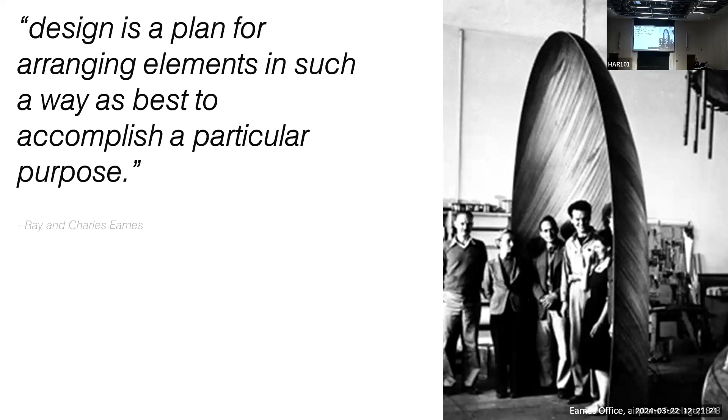And the difference of what we're doing now compared to what they were doing half a century ago is that we now approach this problem from the point of view of how we can use computation and computational fabrication in order to have entirely new ways of actually getting those materials into space, into the right places.

So this is a shoe from Flyknit. This is also now a bit dated, but it's a really simple thread, right? So not a huge classic material science innovation. Same threads, maybe some different colors, but now we're using computational design and digital fabrication in order to come up with entirely new functional and also aesthetic patterning within this.

In architecture and building construction, even within the institutes and the places that I have worked, typically this type of synthesis between the kind of digital fabrication machines and the material tends to look like this. So it's like, what can we get from the car industry? This is a Tesla fabrication plant that's probably really close by here. I think it's in Southern California.

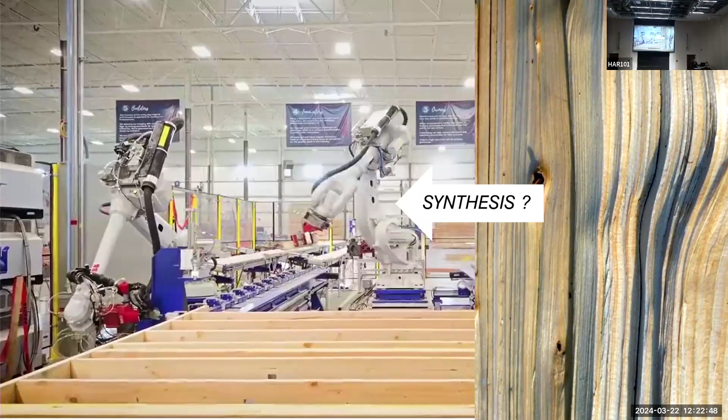But the problem is that then these types of processes don't really address the building materials that they work with. And we can argue that, okay, even if we apply them to these types of building materials, so this is a plant in Idaho, actually, where the robots are automating basically stick frame panel construction. So even if we have these tools, again, now they're just putting the materials together in the same way that humans would put them together.

But this is a robot that can lift like 1,000 pounds probably. And then at the same time, the architecture that we get out of that is the same architecture. And that to me doesn't really make sense. And I don't think that in the end, it really means that we're utilizing what the materials can do, because these are the same materials that we've worked with for a long time. And now we have these ways of approaching them differently.

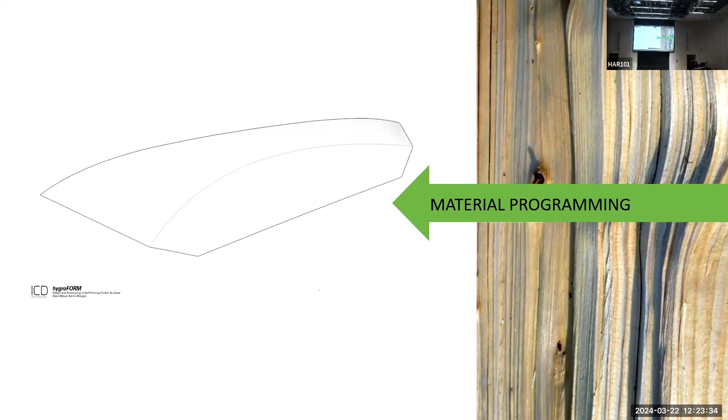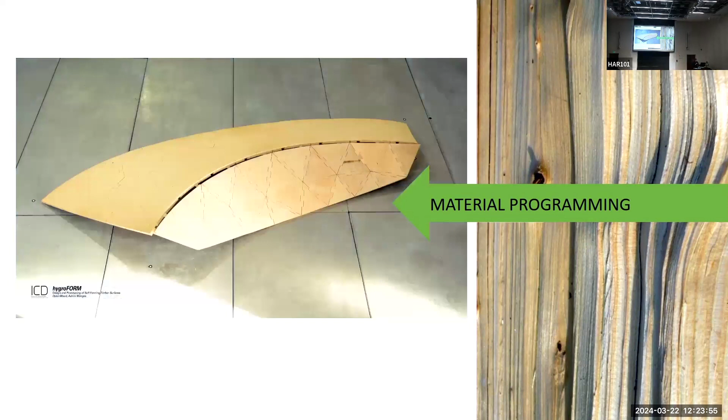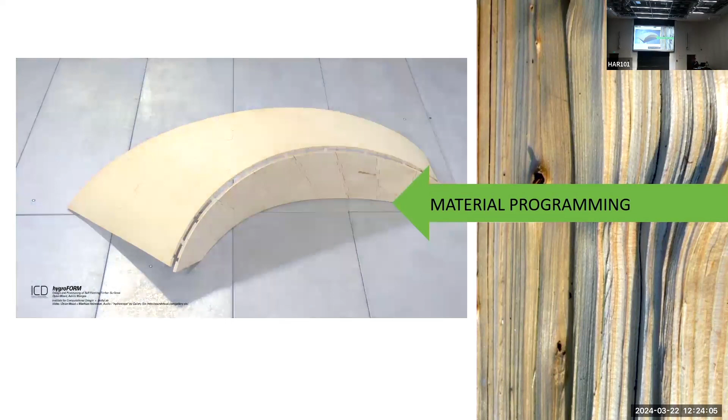So one way that we propose in my group in order to address this is to come up with this idea of material programming. And we define material programming as a method of design in which we can use computation and fabrication to encode functions and structure directly within physical material systems, of course, based on what the materials can actually do. And through these fabrication logics, we can develop new methods of lightweight and light touch construction. And we can also apply these in different types of building components and building systems.

And the advantage being that because we rely on what the material can do, we can embed a lot more functionalities without going towards these sort of electronic control systems, which are good for some things and maybe not for others. But the best example of material programming actually probably still comes from nature in something like the spruce cone, which I would encourage you to go get some spruce cones from the park over there and try this out because it will work 100% of the time.

So what happens in the spruce cone is that the bracts or the scales of the cone, when the cone falls from the tree, they start drying out, they lose moisture, and they open up automatically in order to release the seeds from the cone. And the way that this works is that there's no Arduino kit or sensors or actuators embedded in this. That would be insane if you think about how many pine cones there are on Earth and how many bracts open. I think it would be like billions, right?

So similarly for buildings, there's lots of electronic controls. That's really great. But if you need an Arduino in every window that you have, you're going to start to reach a sort of financial and kind of complexity problem. So the way that it works in the pine cone is that the structure of the cells inside of the bracts give it this functionality to both protect the cone, but then also actuate through a change in moisture.

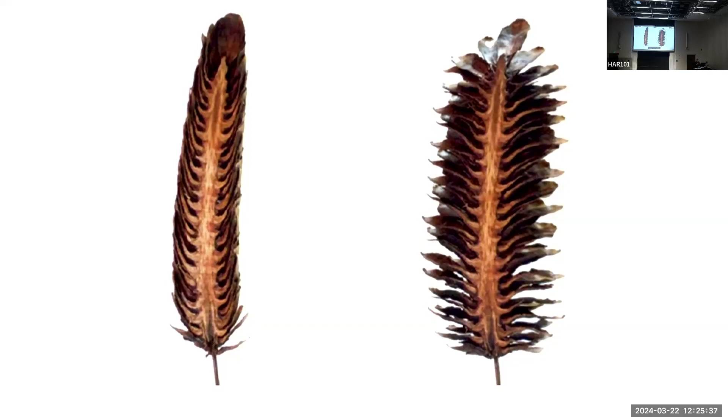So when we think about the pine cone, we can define this kind of material programming logic within here. So we have an input that's a sort of sensing the change in moisture content in the air or in the relative humidity in the air. Then there's a physical computation, and then there's an actuation, the actuation being the opening of the scales. And we call this programming because we have a reliable comparison between an input and an output. So there's no digital signals here, but we can define an equation or a relationship that is repeatable, and in that case, we say it's a program.

The really interesting thing is that wood as a material, very similar to the pine cone, is made of cellulosic materials. And it also has the same function of changing its shape when it changes its moisture content, which is what powers the movement in the pine cone. And we call this type of action hygromorphic, hygro meaning changing with water, and morphic meaning changing shape. And in science, this is also called hygroscopic properties, but this doesn't relate directly necessarily to the change in shape, so we'll say hygromorphic.

In wood, this happens because within all types of wood there are these little cellulose fibers, and those get bigger and smaller when they have more or less water inside of them.

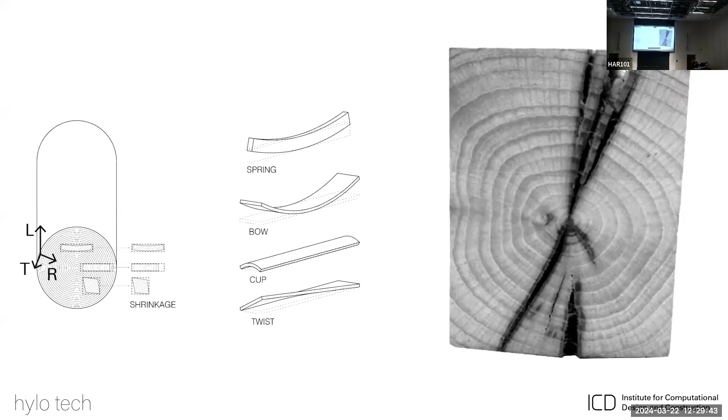This change in shape happens in relatively normal conditions on Earth. We're not talking about space architecture, a really popular thing to study at MIT—we're talking about things here on Earth. The material is made here on Earth, and it's also designed to function very well here on Earth.

Again, if we apply a digital lens or programming lens to that, we can take a block of wood and scientifically define, from both literature and physical testing, how these different properties behave in the anatomical directions, which are defined as tangential, radial, and longitudinal. You can see that the values are very different in the different directions. That becomes our base for programming—the inputs that we put into our digital and physical code.

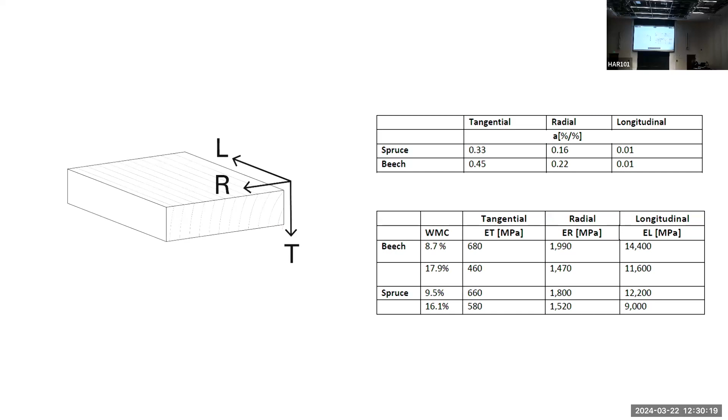Very early on, I did a lot of work as a master's student on how we can upscale these properties—how we can take a basic log and break it down logically in a way that makes sense for reshaping it through the hygromorphic properties, then basically put it back together so that it actually does this. We call this form generation.

Now I'm going to explain a couple of projects that fall into those lines of form generation.

But first I have to explain a little bit about the research group where I work, because when I say 'we,' it's not metaphorical—it's actually a large team of people across different disciplines working on these types of projects. The projects range, and the approach of material programming is applied across all different scales, even though the approach is very similar.

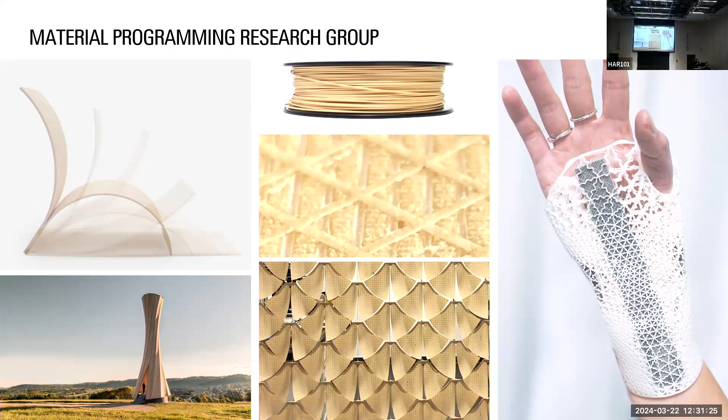So we work on things down to wearables and furniture, as well as building facades, and on the bottom left, full scale load-bearing building components. But the principles are all the same, and it's kind of the same team, mostly made of architects, actually.

In Stuttgart, this is where our group sat. We worked within an institute, the Institute for Computational Design and Construction, run by Professor Achim Menges, and we also worked closely with the Institute for Building Structures and Structural Design, run by Professor Jan Knippers.

So that's sort of where our internal group sat. But we also work with larger funding bodies and centers, as well as other institutes in the university, and industry partners ranging from building construction to footwear, as well as many international partners. So we are interdisciplinary, but also working across the range of fundamental research as well as industry-sponsored work.

These are the people involved. You might also know Tiffany Chen, a USC undergrad and BArch grad one year after me, who followed a similar path through Cambridge to come work in Stuttgart. We had a team of six or seven really great people in Stuttgart, mostly from design backgrounds. Now at the University of Oregon, I have a much younger team of undergrad and graduate students working on these topics.

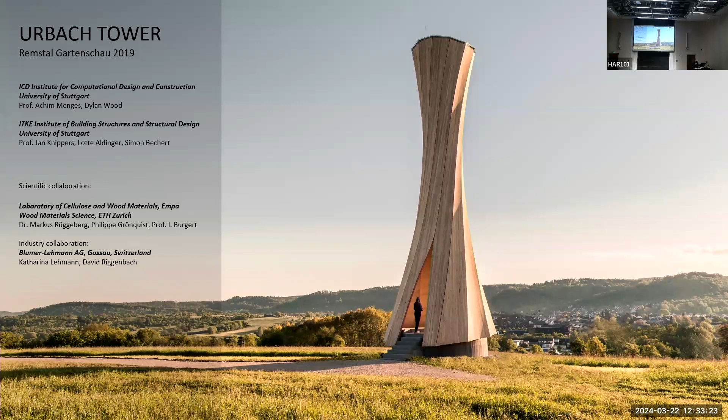The first project is the Urbach Tower, made in 2019 in southern Germany, and it's still there. This came about after my master's thesis in Stuttgart, when we got funding from the Swiss Foundation, which funds industry innovation in Switzerland, to think about how we could upscale these hygromorphic self-shaping concepts to work on a building scale.

At the same time, mass timber is really big now in the US, but it's been around for a long time in Europe. Still, the impact of mass timber is in these really boxy forms, which in engineering are grouped into a category where we have mass timber but are still applying it as if it were precast concrete panels. You see that in the resulting architecture.

So it's this very boxy result, which is great—it's a good first step. But what we want to look at is what architecture that really belongs to timber, or really emerges from timber and these digital technologies, would look like. It's not going to be classic timber frames, and it's not going to be something emulating another material system. It's going to be something different.

At the same time, CLT, or cross-laminated timber, that you see here actually has a material programming logic to it with the layers and layups that exist. It's just that this has always been geared towards structural performance.

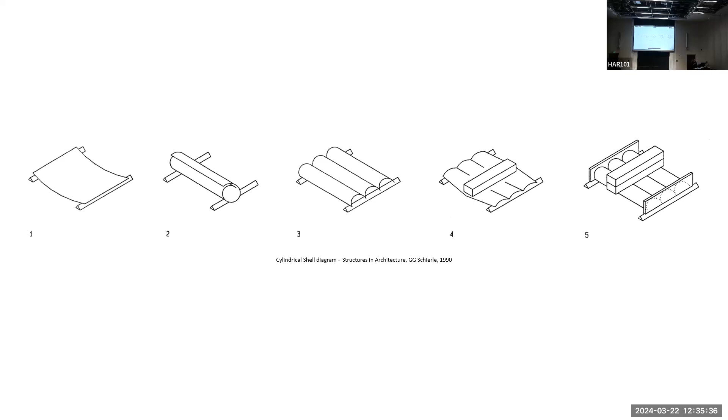There's also a simpler approach: you can use curvature, use geometry. Then you can span a much larger distance with considerably less material. In wood, you can make curved shapes, it's just way more expensive. You see this in a lot of really expensive buildings, for Swatch or Omega, Swiss watch companies, or in golf courses and things like that. You can do it with beams, but it's very expensive and exponentially more so as you become more complex in your curvature.

And the processes for getting there are relatively crude—you have to bend it, or in most cases, you just build a big rectangle and cut out a curve shape, which tends to be cheaper in practice.

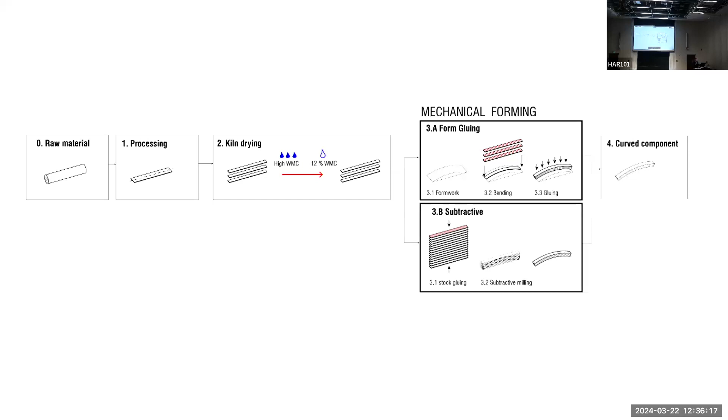What we proposed, working with industry partner Blumer Lehmann in Gosau, Switzerland, is that we could implement this self-shaping approach of generating curvature through hygromorphic properties into their existing workflow of drying timber from the trees, then curve elements in a parallel process and glue them together to get a bigger curved element.

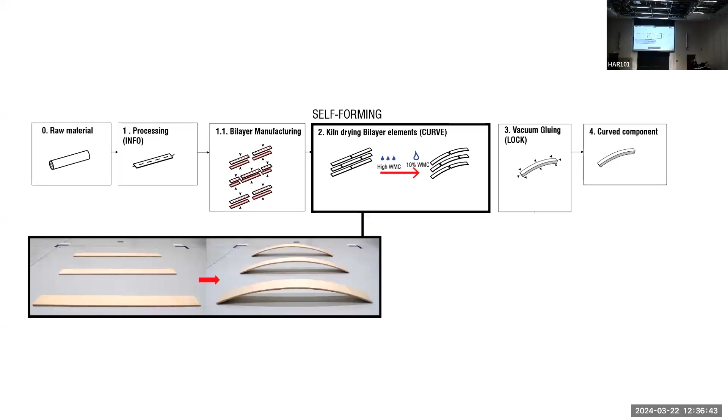At the same time, we worked closely with wood scientists and engineers to develop methods for predicting this type of movement. We used really analytical equations like this, from the 1920s, that work really well—they were developed for bimetals in thermostats. I'm sure Doris knows these equations very well.

They're awesome, they work really, really well. But we also work on really high-tech ways of doing that, in which there are numeric modeling methods being developed to model hygromorphic properties in wood.

There's a lot of funding in this, because if you imagine a 50-story building, each story, even if it just moves a few millimeters, by the time you get to the top you've got a really big problem. Thomas Robinson from Lever told me a few weeks ago in his lecture that in a normal stick frame building you get maybe 5 inches off by the time you get to the top of the building, and this is a real problem.

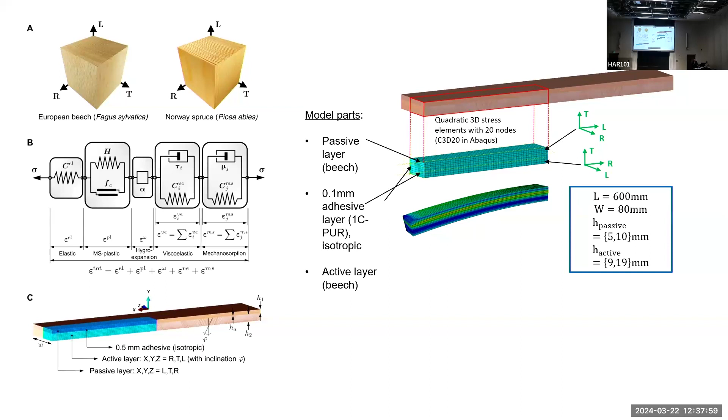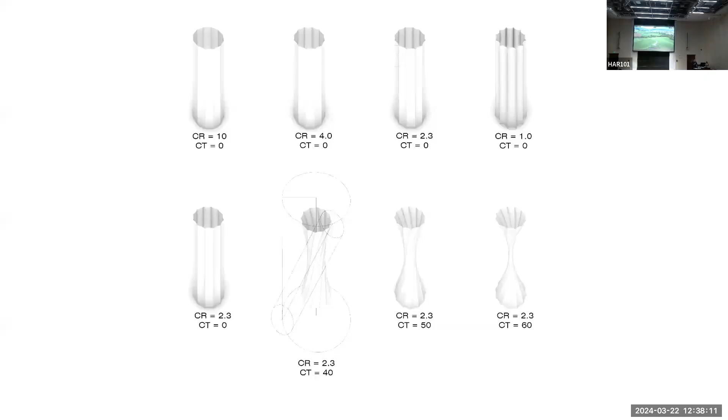So it's a problem we have to address, and we piggyback onto that modeling here for a kind of extreme case. At the same time, we work as architects, so we were asked to design a tower structure. That might seem random, but it's perfect because it gives us an opportunity to show how strong this can be and also how light it can be.

Working with Grasshopper and Rhino, and also some connections to engineering software, we're able to come up with geometries that work really well with the types of shapes or surfaces we can generate using the self-shaping process. This looks like a really simple Grasshopper exercise. I'd challenge you, if you think you can recreate it, go for it. There are a lot of YouTube videos of people who've done it incorrectly.

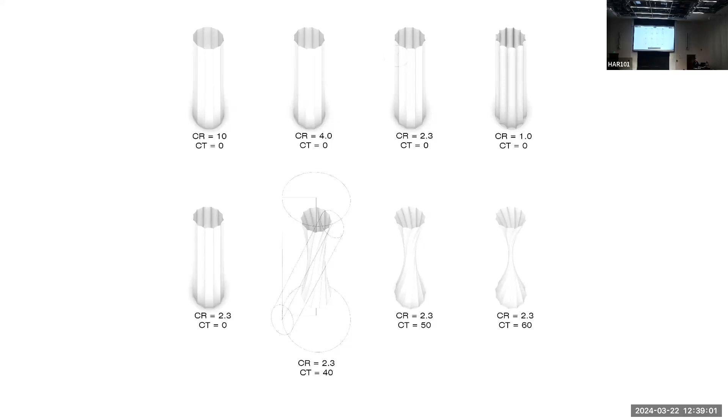But here it's about really matching what you can create with the research to come up with new forms. These forms are particularly interesting because they're sort of segmented shells, so they're not continuous, and they're made from single curvature elements - that's what you can see here. So it's not like a dome or a hyper shape, but when we put all of those elements together, we do get a hyper-shaped, sort of double-curved overall geometry, which works really well structurally.

So we end up with a kind of corrugated surface structure that doesn't fit into any categories or typologies, but works really well structurally and also aesthetically. And then we model a lot of the connections, of course - that's where the digital planning comes in and really works.

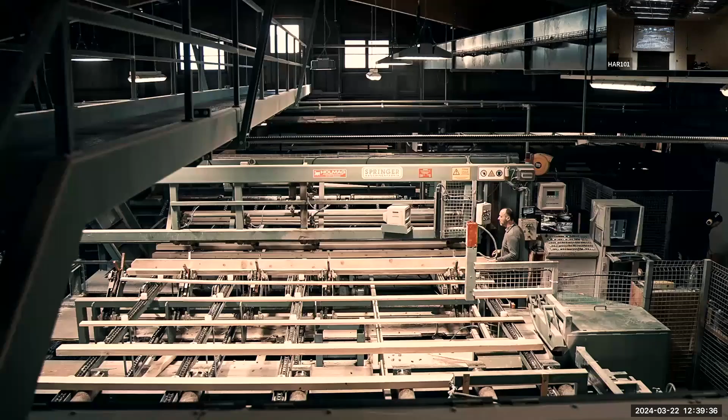We'll try to pick up speed so we can go through more of these. So the process here is very digital - we do tons of planning, but then the manufacturing starts here with this guy, explaining to him in Swiss German, which is a totally different language that changes constantly, how to actually sort out the boards as they go through the line.

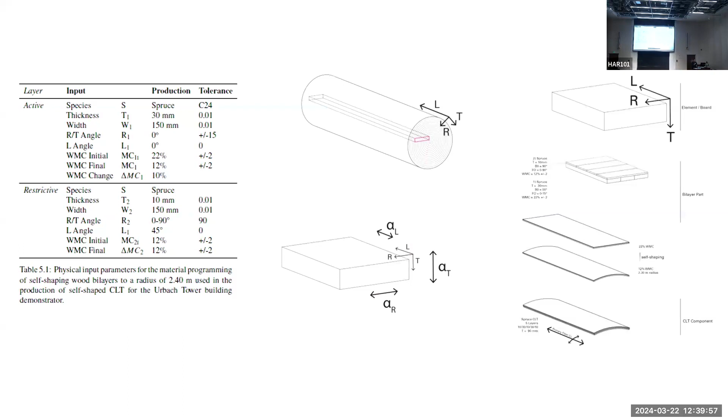So this is the code, or the programming code, that came from all this work, and it tells him simply which boards to choose from this continuous throughput of boards. We're just choosing based on moisture content and grain angle, so there's nothing complicated. There's no special wood, it's not the more expensive wood - it's just telling him to sort based on simple parameters.

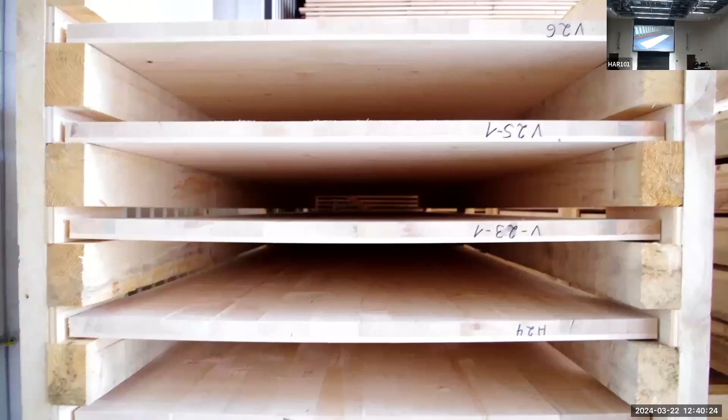And then we glue those into flat plates. Then they go into the kiln where they get dried mechanically - this is what happens inside the kiln. So we have these huge flat plates, and kind of magically, as they lose moisture content, the curvature emerges, sort of for free.

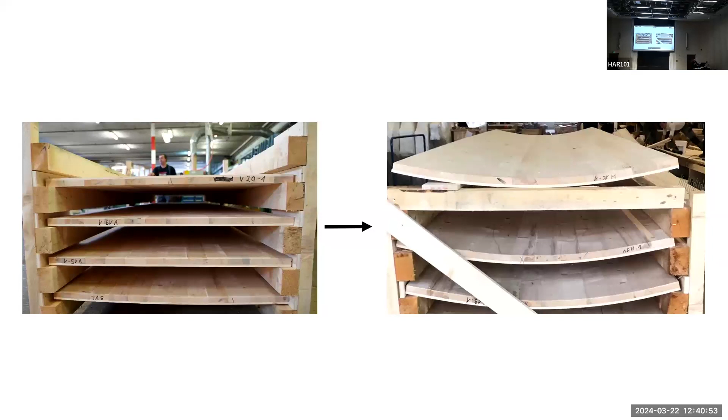They do this on a massive scale in the factory, so it's a parallel production process, which is different from using a mold - which is really great. They all shape at the same time when they put them in the kiln, so you don't have to wait. And then here you can see already, even though they look shallowly curved because they're so long, you can see how that gives stiffness to the panel.

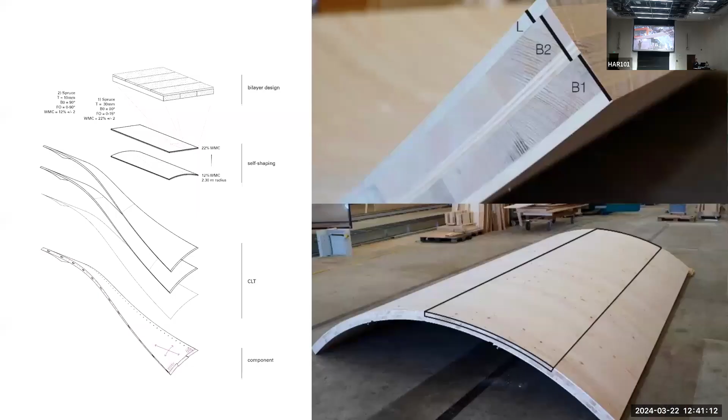So this is about a 1 inch thick panel, and it doesn't bend in the opposite direction when we pick it up with the crane. Then we put all of these plates together, glue them, and lock them into shape, and build them into bigger components. We have to structurally test this to prove that it works as normal CLT would in a structural situation.

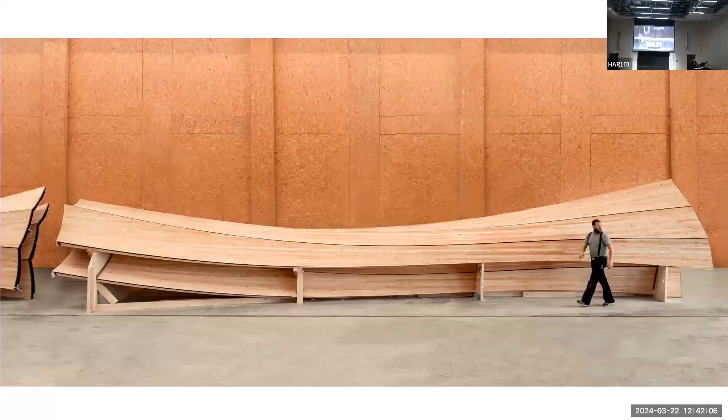So then they get pre-assembled into these packets, also with a timber facade. On site, all the holes are already there for all of the screws in the connections that have to happen on site. That means it's 100% prefabricated. They come in here and like 4 guys put the whole tower up in 8 hours.

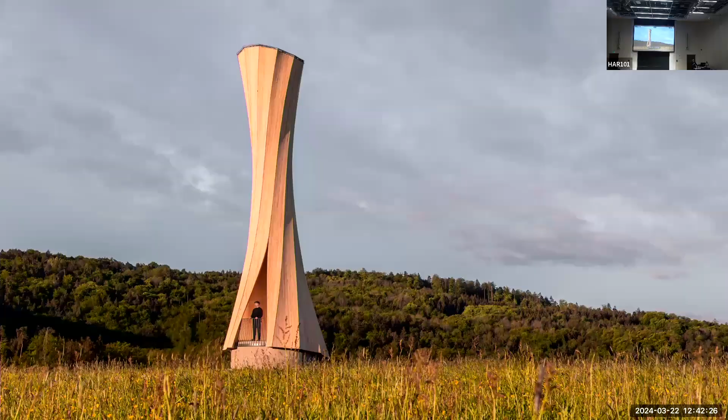That's especially important because this was on a natural preserve site, so the site impact is really limited. In contrast, it took 2.5 weeks for the concrete fabricators to put in the foundation. So 2.5 weeks versus 8 hours on site—it's a really big difference.

What we get is this structure that from the outside has these really sharp curves, but on the inside takes on a slightly different type of texture. It's 14 meters tall, acting basically like a cantilever, and it has to take wind load. But at the same time, it's only 90 millimeters thick—about this thick.

And if Sigrid was here, we could debate how to compare that to an eggshell, and that would be really fun. We have different opinions about that, but I think it's thinner than an eggshell, proportionally.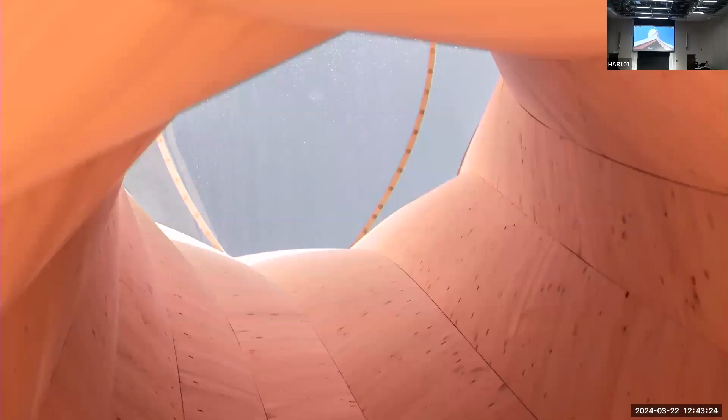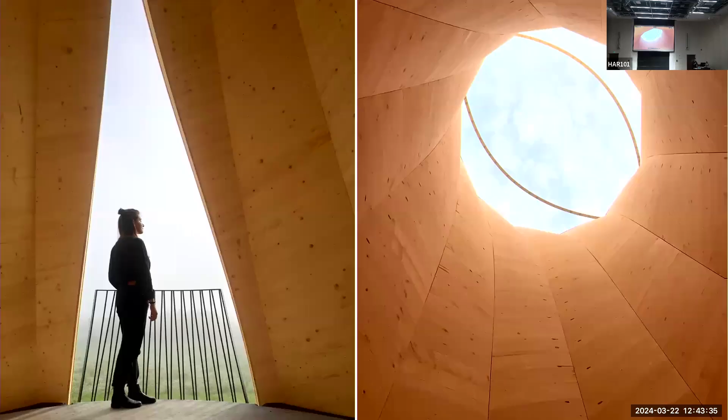But maybe more interesting is that architecturally on the inside, we get this incredibly soft, almost pillow-like texture, which isn't common for timber. Now that we have curved surfaces in timber, this is what we get—and it's doing a lot of work. So this becomes a kind of chapel. It doesn't have a huge functionality, it's kind of like the little chapel here at USC, if you've ever been there, or some of these Zumthor projects that sit in the landscape and change your interpretation of the landscape around you—a very known situation that puts you in a very unknown one.

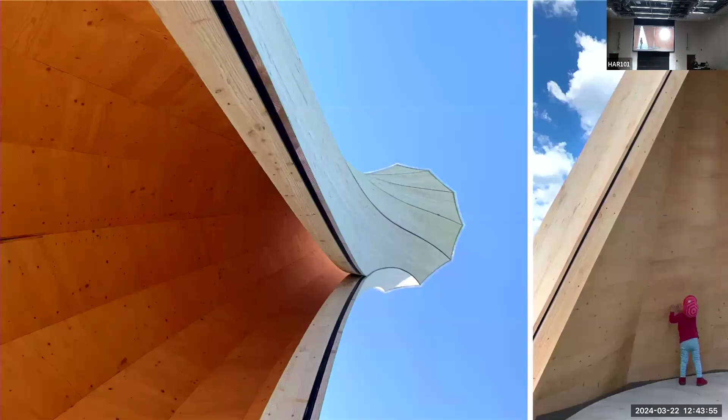At the same time, what's most impressive is that here the timber is doing all of the work. It's a monocoque shell, it's the cladding, and it's also unfinished—safe for this child to touch. We don't need to treat it with anything special on the inside. And not only that, but it's also like the machine that shaped itself—it becomes both the fabrication machine and the structure at the end.

And then it sits in this landscape really beautifully, and it's also become a kind of local landmark that's accessible primarily by bike and by foot. We're hoping that it will stay there for many years to come.

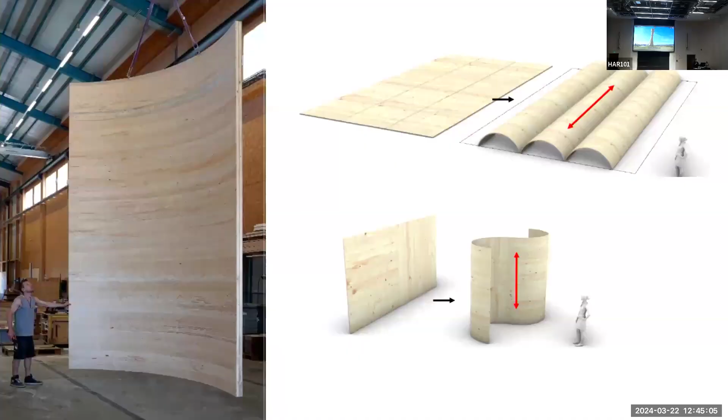At the same time, on the research side, we continue working on it. These are some leftover pieces from the project that we turned into structural components as demonstrators, and we're working on how to apply this as wall and roof components.

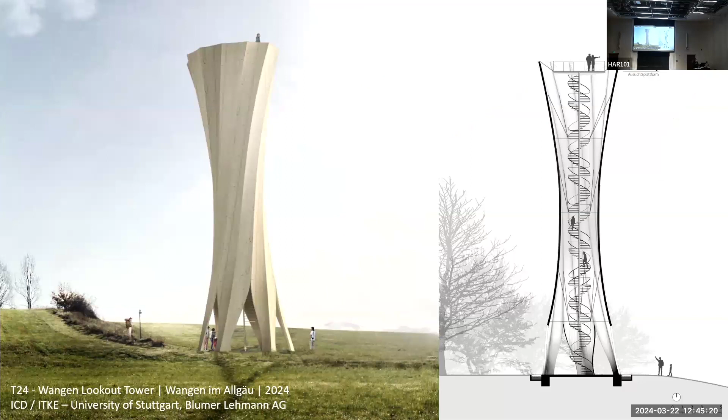We're also at the moment constructing another taller tower—this one will be 22 meters tall in the end. It has a staircase in the middle that allows you to actually experience going up through this winding form. What's fantastic about this is it also represents a huge shift in the perception of the materials we use.

Here the timber is taking all the wind load as a shell, and it's also taking the gravity load of the platform, while the steel is really just kind of there as a staircase. This is an inversion of how we'd typically do this—usually steel reinforces the timber and provides all the strength. Here, because we get the geometry of the timber right, hopefully the timber is doing all of the work.

That's huge because it represents a total shift in what we think materials can do. We could probably get rid of the steel even, if we wanted a more solid staircase. Also impressive is how thin it is. We don't need to use a lot of timber in order to do that, as long as we get it into the right shape.

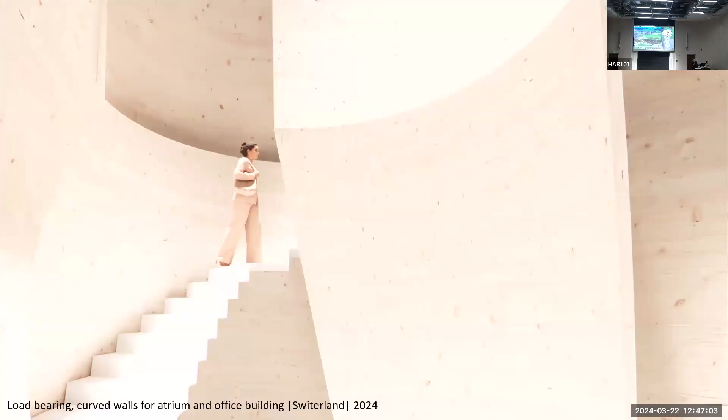At the same time, we're also working on another project which uses these in structural walls, almost like shear walls. Again, we can make them thinner, and we also get a really nice architectural experience.

But maybe even more interesting is that through this, we start to develop more machine learning based methods that utilize machine learning and machine vision to take a different approach to predicting the geometry and shape change. Through these new projects, we record tons of data in the manufacturing process, and mix that data in a hybrid method with synthetic data that comes from the models. We've proven that through all of that, we can actually outperform statistically the Timoshenko model, which is the analytical model, as well as these ultra advanced models that use typical numerical methods.

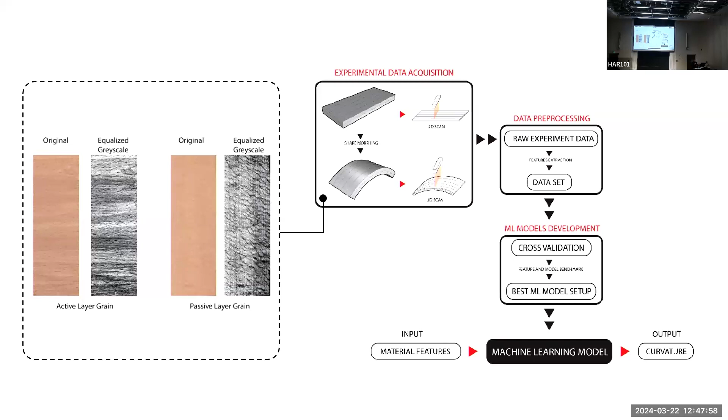Now I'm going to show you, I think we'll only have time for one other project, but I'll show you this one. From there we can also apply these principles to form adaptation. So here, not necessarily just generating the form, but designing it in a way that it can actually adapt to changes in the environment that happen.

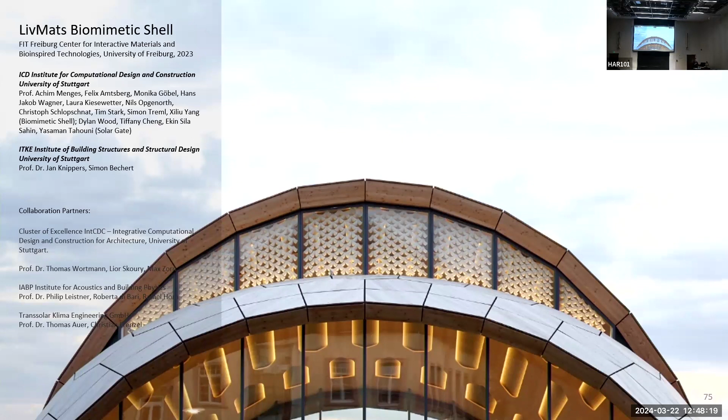We'll show this through a project called the LivMats biomimetic shell. It's also in southern Germany, and it's actually constructed now. This built on a lot of previous work in the institute that looked at how we could use wood materials and new materials in a way that they actually adapt and change their shape in relation to the environment.

The concept is really similar because we use wood-based composites. The difference here is that we need to reconstruct the material, working on a smaller scale, and like timber, it has an existing structure. So instead of utilizing that existing structure, we take it apart and put it back together into new types of materials where we can further tune how they work.

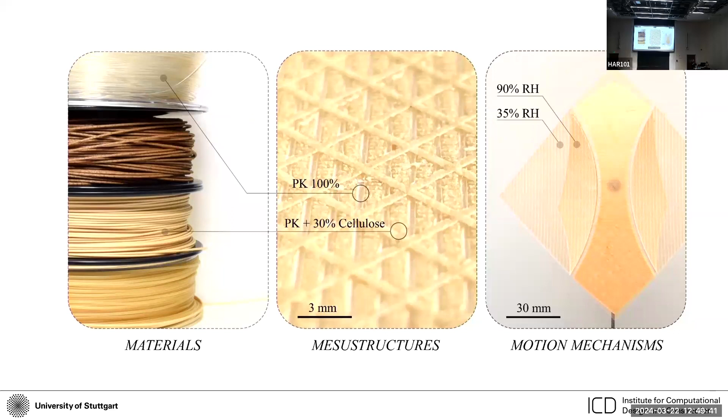We do that on three different levels. One is really in the materials themselves, so working with plastics engineers, we take cellulose fibers, which are incredibly cheap - it's like the cheapest material on earth, used actually as food additives - and mix that into bioplastics. That's one level we can tune. Then on the next level, we use a 3D printer to structure them up, on the millimeter scale. And then we use our more architectural and design scale approaches on this multi-millimeter level to design motion mechanisms.

And this is what we get. So this is a lab test here, you can see it opening when we have a high moisture content - this one is sped up. And then when we lower the moisture content in the lab down to 35%, which you still experience on Earth, it closes up. And then this is the best part of the whole video.

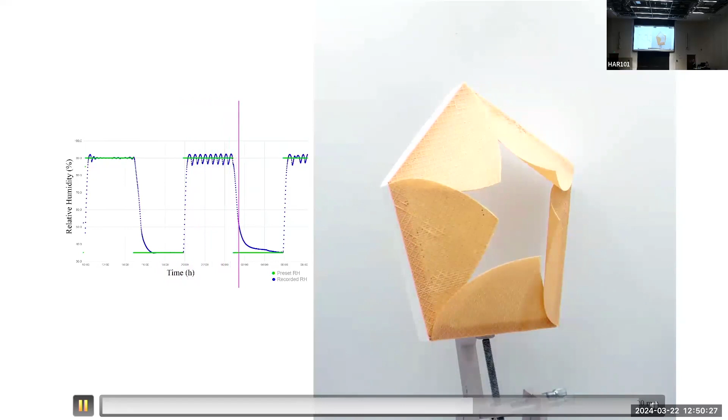Here, our mechanical system in the chamber actually malfunctions, so you can see it flickering, right? And you can see how quickly the materials respond - they're like hard-coded to the changes in moisture in the air on a really direct level.

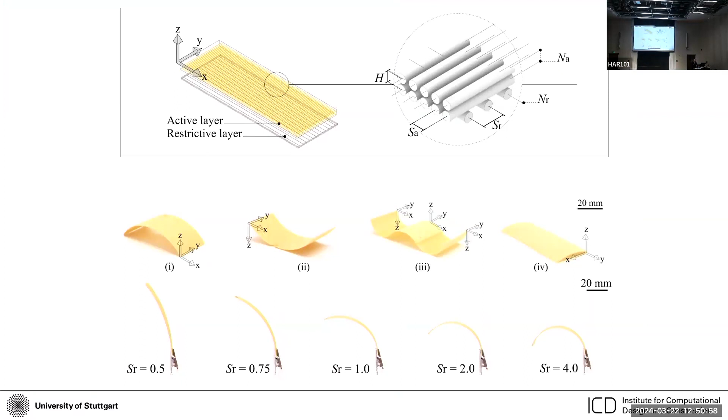The way we make them is from this sort of powder material. We integrate it in, then we 3D print it again with the basic off-the-shelf, cheapest 3D printer you can buy, but we program it ourselves, giving the 3D printer slightly more intelligent methods. Then we can tune the shape and directionality just through this line structure that we build up. We can also choreograph the speed, which is really, really fun.

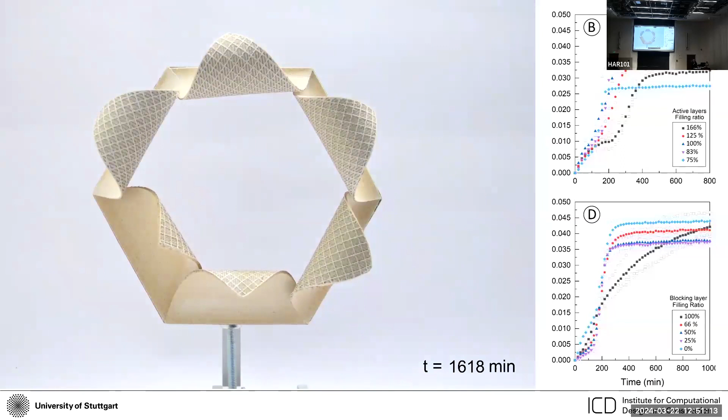So here we have the same thickness, and one operates in minutes and one operates on the far end in days, which is really, really cool. So we can do that without drastically changing the mechanical properties, which is quite useful.

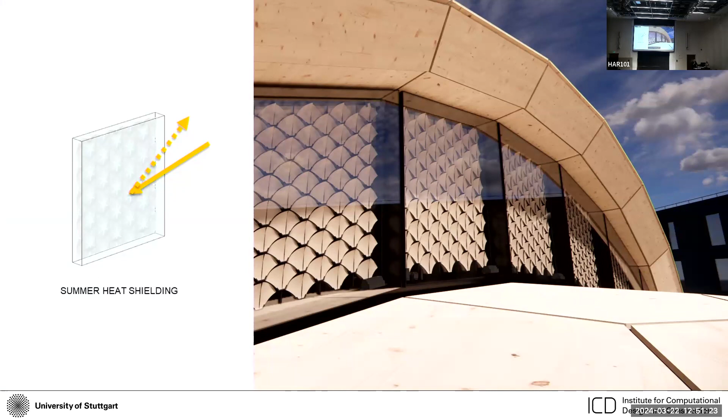And then we look at how we can apply this in a building facade. So shading in the summer, shielding from the heat, and then letting the facade open up so that we can gather heat in the winter. And we work also on this one with Thomas Auer at Transsolar in order to really start to quantify this. We're not quite there, but you can see, so this is our building.

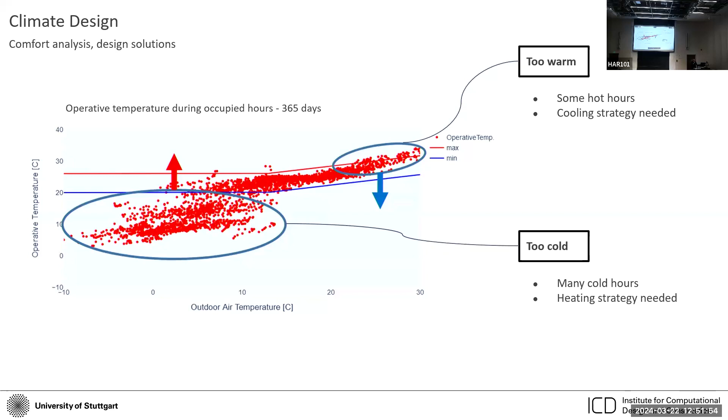We have some comfort days that are too cold. That tended to be the driving factor. Then we have some that are too warm. In that climate, that was not the biggest issue. So what we do is we orient the facade here to the south so that we can get as much heat in the winter as we can. But then that means that we need to have this adaptive shading system to reliably shade that in the summer.

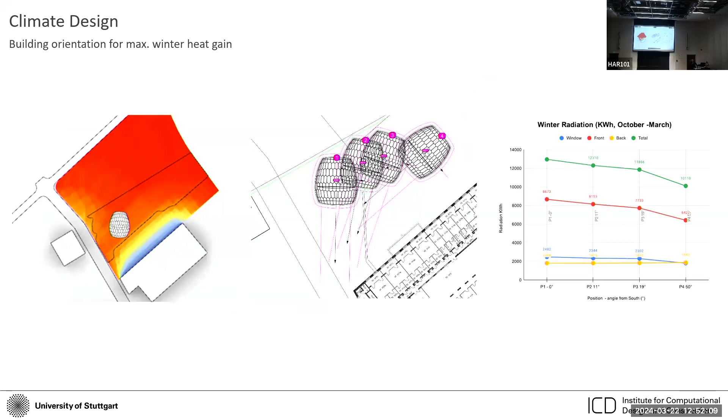We have the advantage here that we design the building at the same time, so we can do things like adjust the overhangs to work with our system. And then we're able to develop a method in which we actually build almost like a framework for testing these materials. And the idea is that our materials will go into the facade now, and then in a couple of years, it's built so that other people can test materials in there as well.

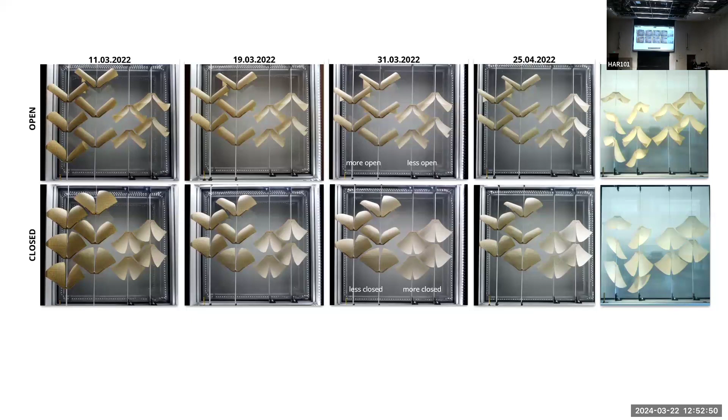So our lab designed this whole framework, down to the detailing. It requires a ton of material tests. These things can be sometimes unpredictable. And we have to take into consideration UV exposure, for example. This is the video that I really wanted to show you, Doris. So this is a lab test. We did this over COVID. It was great. We just stick it in there, let it go for a week.

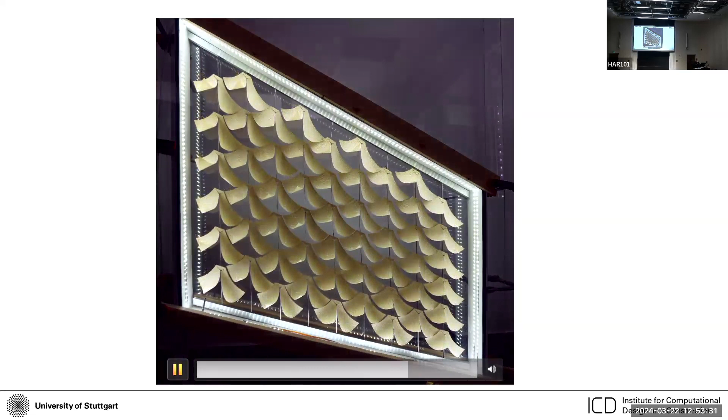But what you should see here is, okay, beautiful movement, right? In our system, really great. And then at some point in here, you will see that before our system fails, the lights actually start falling off, if I have the right video. And the testing system itself actually starts to fail before our material system. Maybe I got the new edited video.

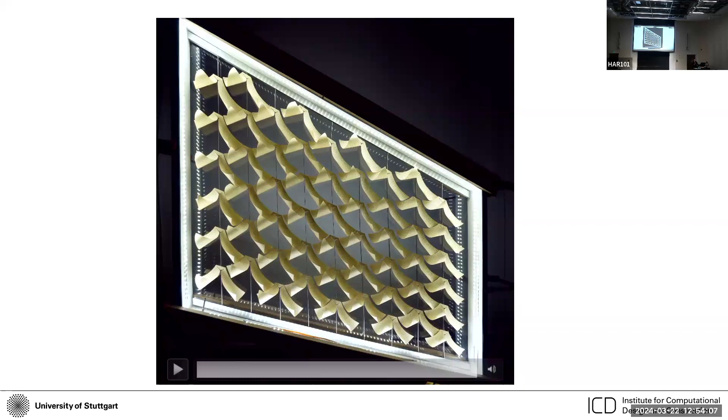Okay, but what you can see is that we have an insanely coordinated and reliable movement, which is very natural, but it's not something that you would ever expect with a machine. I've never seen a machine that can move like that. Doris, some of your work gets to that, right? But you still always have a popping, right? Or a flip through. So this is completely silent, 100% silent, I guarantee you. Okay, so that's how that works.

We installed it then live, so we tested it in our lab for over a year in a facade that was built up on a scaffolding at the exact orientation and height as it would be in the building in order to prove it. A lot of it failed. We had to redo this over and over again. And then we installed it in the building, 12 square meters of this, and we could print it with a farm of 12 printers in around a week probably.

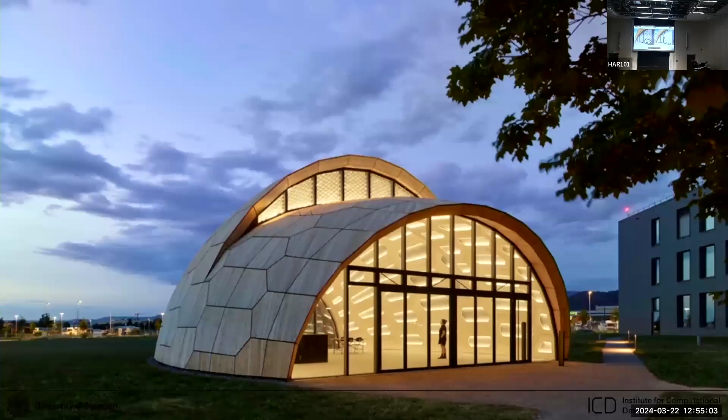And again, we used so little material here. So the material cost here is so low because the cellulose powder that we buy, which is doing all of the work, you normally buy by the ton. So we had to pay extra money in order to get a grain bag full of this cellulose powder that we use here. And that does all of the work, right? And it's the technique that we apply to that relatively dirt cheap material that gives it the intelligence.

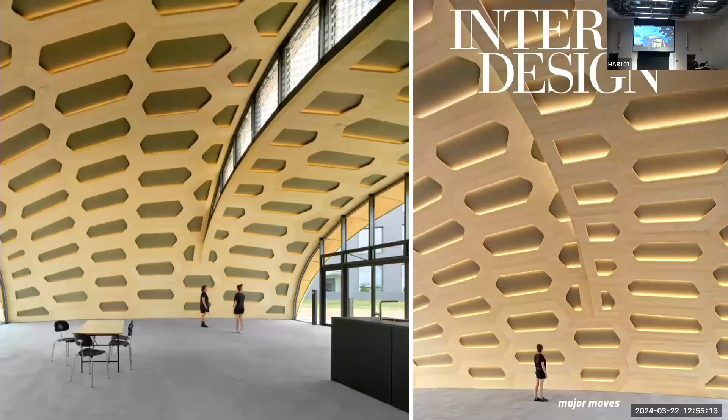This building was also featured recently on the cover of Interior Design. And you can see there the facade system from the inside. And we're currently monitoring that now over a relatively long period of time. I'll go through these really quickly so that you can see them, but I'll just click through.

So we also have applied this on a furniture scale. So taking similar principles to material programming and how we can use wood. The idea here is that you actually can do form generation in situ. So we have the wood in 2 or 3 layer systems here, and then inside your house, this happens overnight.

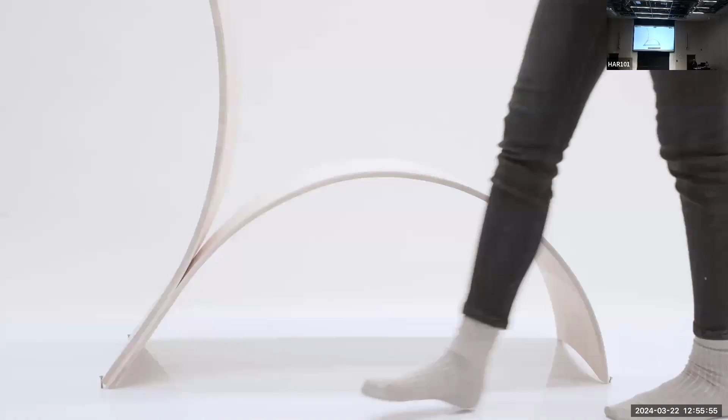And then you have a finished piece of seating. And we're pursuing this currently with a couple of furniture manufacturers in Germany as a sort of new technology that we can apply in the furniture industry. We have a couple different versions of this. They use different mechanisms. These are not really so bio-inspired, but more mechanics inspired. So one unfurls, one sort of slips under the other and then clicks.

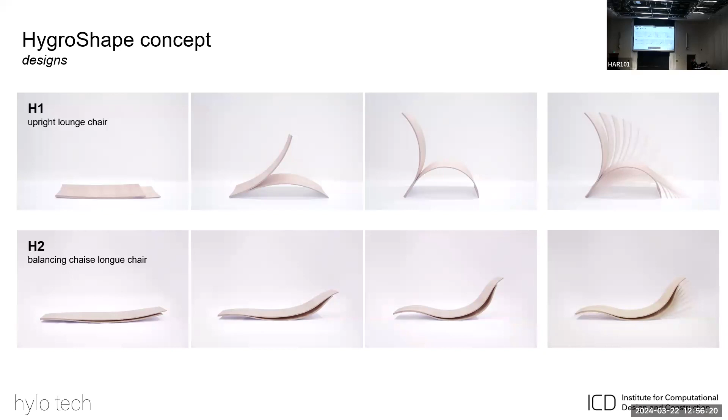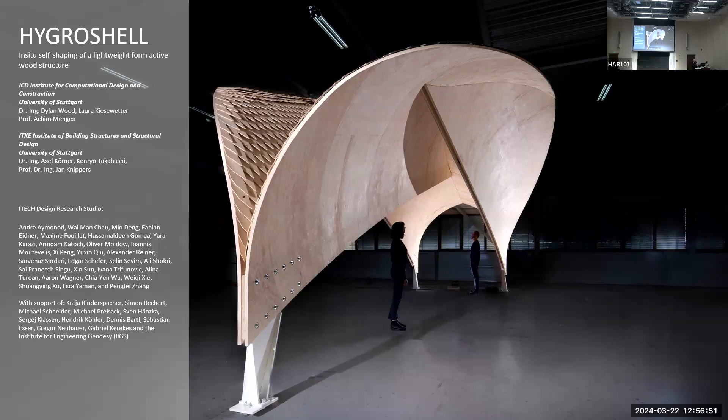That's the lounge chair. And this is our company that is focusing on that and also on industrializing the self-shaping technology for big components. And then lastly, I want to show you this more recent project, which is called the HygroShell, which was a student project. So this was run in a design studio over a year with MS students. And although it's a smaller project, it puts all of these ideas together and is a really new way that we look at it.

So if we think about, again, how do we get the material into these shapes? Usually, if you did concrete, you do it with a wood formwork. And in the end, you probably don't see that many concrete shells like this because it's really complicated to make the formwork. In Stuttgart, there's a really famous train station building that's been going up that was designed by Frei Otto, and also Werner Sobek doing the engineering. It's insanely beautiful now. It's almost finished, but it's crazy because they actually build this geometry 3 times.

So they build it out of CLT. That's what you see on the sides, right? And all that CLT is in the trash now because they have to coat it with something to get it off of the concrete. Then they build it out of steel. So you have this insanely complicated rebar structure in the middle of there, right? And then they pour the concrete in. So it's like 3 times the work in order to get the geometry. And students really understand this. If you have to do something 3 times and you could just do it intelligently once, that would probably help you a lot in your studio projects.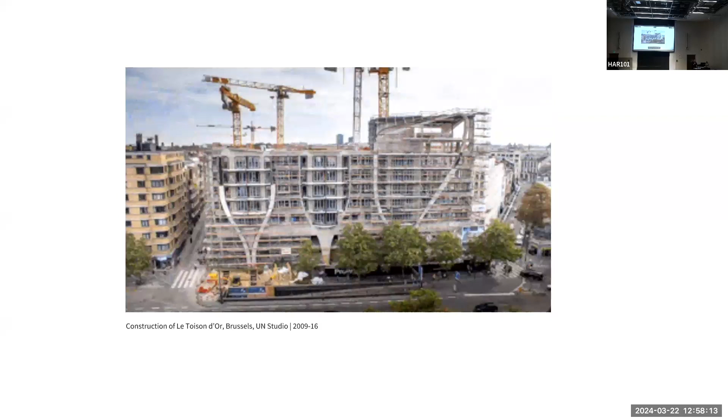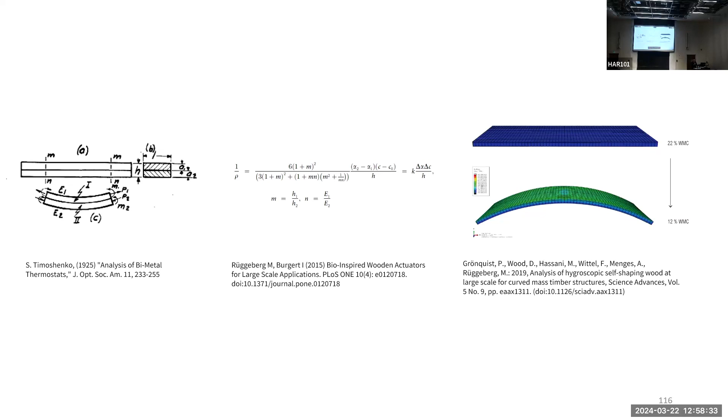And at the same time, if we do shape on site, we have a lot of insane processes that go into getting these geometries. So this is a UN Studio building. It's in an urban context, it's a huge impact, right? It's also really noisy. I think we should have sound on this video to get the point across. And again, we're going to use the same technology. Here we're going back to the Timoshenko equation because we don't have the software licenses to use the numeric models. So we're going back to the Timoshenko equation, and then we're thinking about how can we make this not just a curved element, but actually a curved system.

So how can we actually put not just the curvature in the factory, but while it's still flat, put in the waterproofing, the cladding, and anything else that we need so that we can essentially flat pack a building component. So the students are also working with the tutors, and there's a teaching team on this, it's not just me. We came up with this system that we call the package system, where we put 2 wings together that are flat, and we put all the cladding on, and then they shape on the site when we let them dry out. And I'll just run through this really quickly.

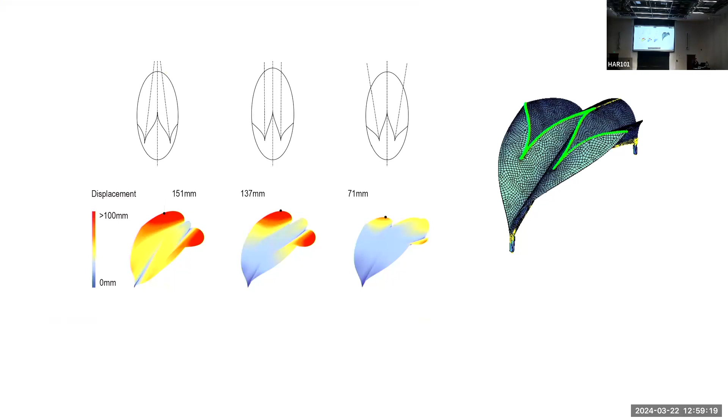So we also work really closely with industry. That's one thing that I want to say. We developed really great algorithms with this project in order to figure out how to arrange the material for the shaping and for structural efficiency. Those don't mean shit unless we actually go and talk to this guy who runs the sawmill, which is 30 kilometers outside of Stuttgart. We also found that one of the biggest carbon impacts is the transportation of the materials. So we get it locally, and that works better.

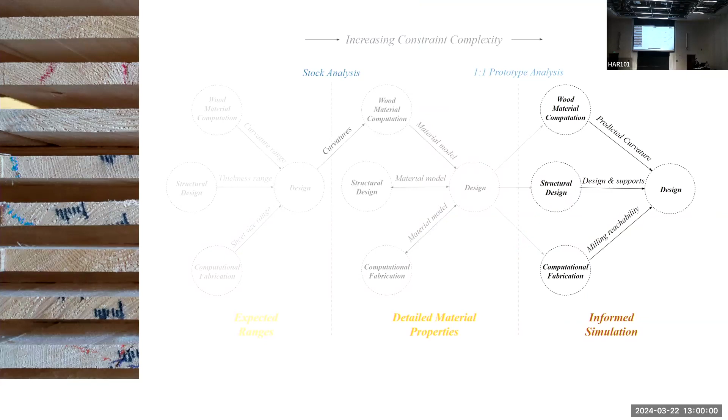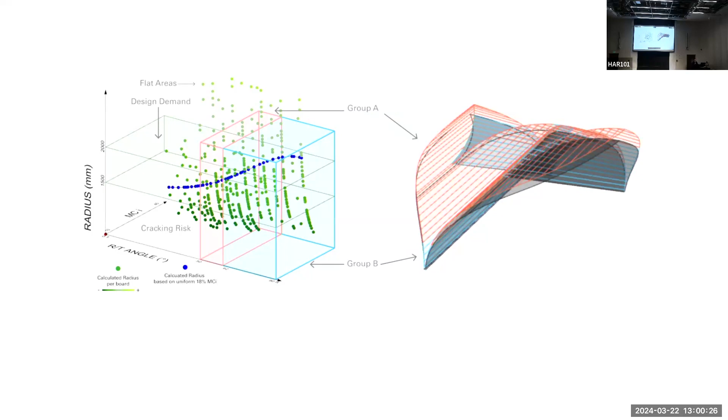And then we have to adjust our methods in order to try to hone in how close we can get to the actual material properties as we go. So in the very beginning, we use literature values. Then we're talking with these people, we're getting more information about it. Then when the material comes into our factory or production hall, we can get very specific, board-specific information. That's what you see on the left. And then with our digital tools, we can actually update the design to match that material that comes in. So we're doing a bit of resource management, as well as geometry adaptation, as well as optimization.

And then we build these out again in the flat state. So these here, we have a very simple system. We had all the boards, we were measuring them every day, 2 parameters every day, and then we rearrange them live. So it looks like we don't have a sorting system. So we have students basically yelling out which board should go in from their computer.

We flat pack them, and then this is what happens on the site over 2 days. So these huge components, they shape out. No one is there. I can tell you 100% no one was there because we were so tired that we took 2 or 3 days off.

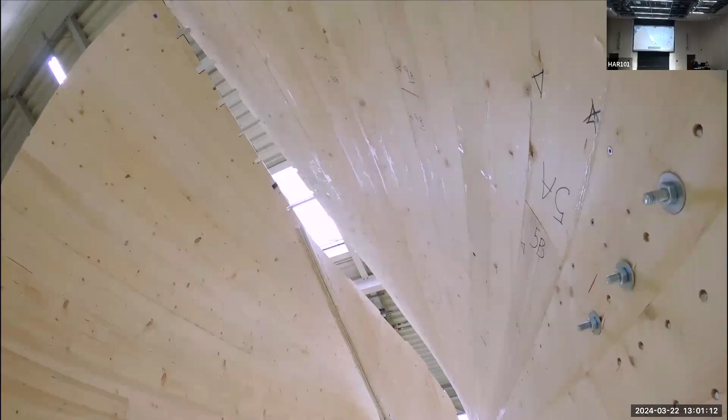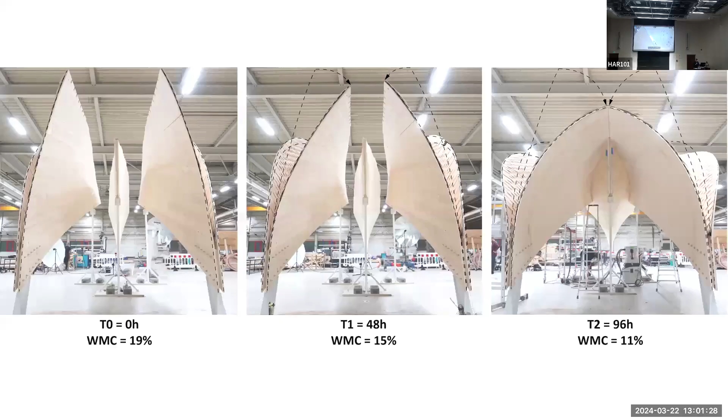And so you change the humidity in the room? We don't change the humidity in the room. So we did it inside as a sort of control, but the environment in the room is not controlled. So the doors are opening. So what we do is that we're able to actually prep the material in a certain way with higher moisture content. But the key here is that there are 2 things, is that we actually do that without drying

the timber. And if you know, this contradicts the previous part of my lecture, but the drying of the timber is 70% of the embedded energy in timber manufacturing. So here we're able to generate the shape and also eliminate 70% of the embedded energy in the manufacturing process and get the material very locally. So it's a sort of hyper example of how working with the material leads inherently to better efficiency.

And we're doing a life cycle analysis on this, but I think that's not really the point, because what we see is that it wasn't that we targeted really little things, we inherently attacked the bigger problem here, right? By looking specifically at the material. And we do a lot of science behind this. We publish, that's the currency. And you can read a lot of our papers if you want more detail on it. But

the sort of result is that we also get a new type of architecture, right? So no structural engineer can really categorize this into one thing or another. Some like that, some don't. So here we're spanning 10 meters, and the really impressive thing, I have to talk about the details, so we get to the detail here, again, all made out of wood except for the weatherproofing layer, which we're working on at OSU. So cladding, also shingles that came locally in southern Germany.

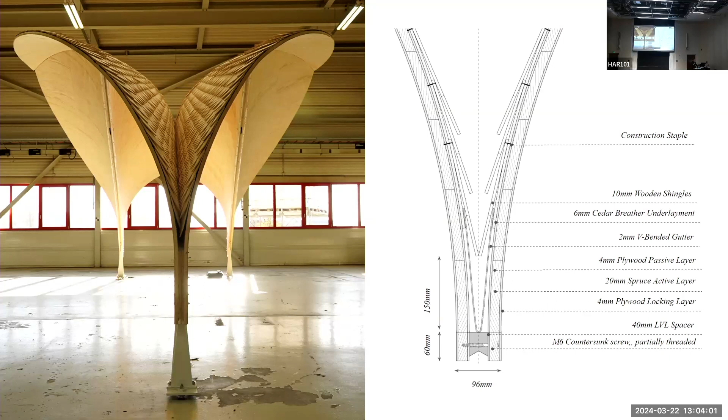But it's really proof that it's not the material, we don't need super high-end material technology. This is just normal material. We get it from a sawmill down the road, right? And when we apply our computational techniques, then we can get really amazing things out of that. We also, of course, involve students in these projects, and they have a lot of fun. They work really intensively on these, and also contribute very highly to the scientific development as well as the architectural design. And I think we can just end there with the video. Is that good? Great, thank you.

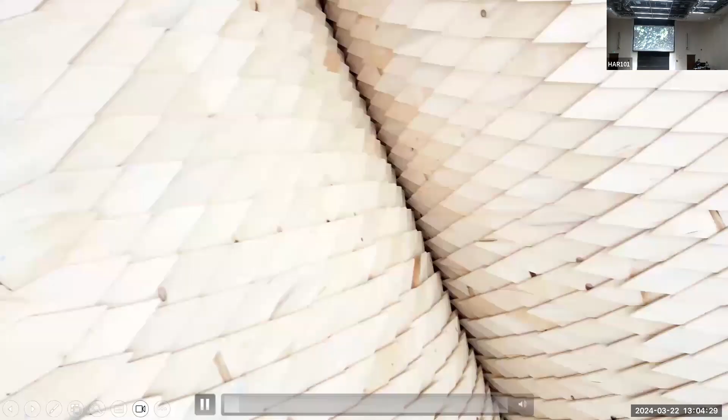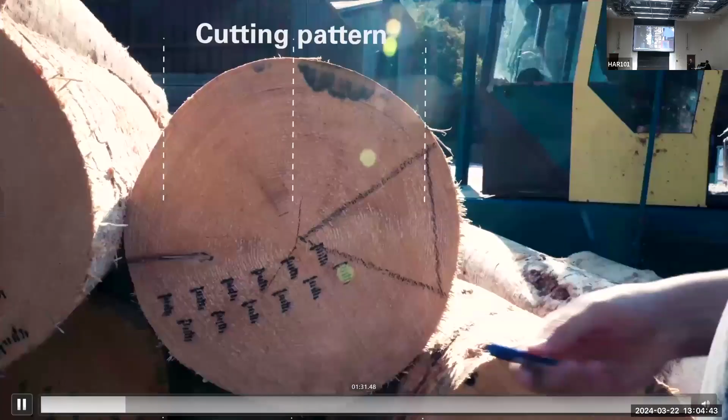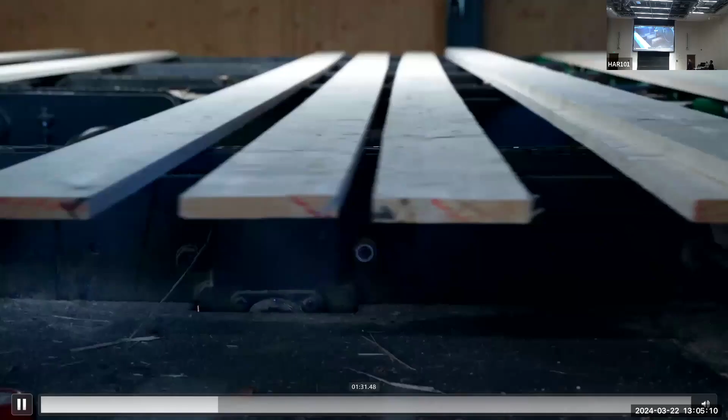Okay, quick. My question was about how you control the degree of the curve when it's in the kiln. Is there a way to basically model it, how do you get it very precise? So we do it all ahead of time. So we plan, the amount of curvature is based on these parameters that we showed. So it's how much moisture the wood starts with, how thick the wood is proportionally between the layers, and also what species it is. So it's all pre-planned. So once it goes in the kiln, no one touches it.

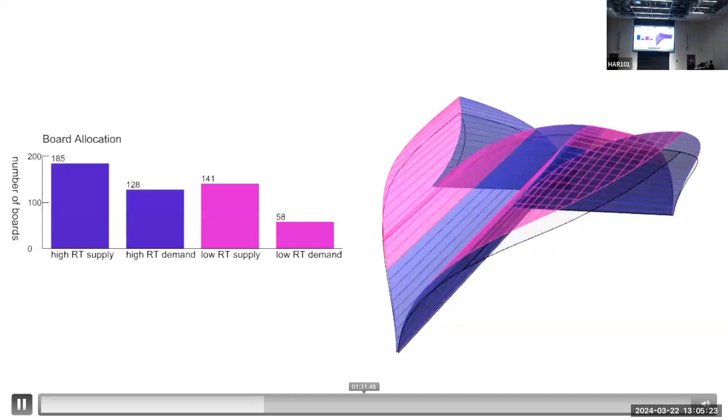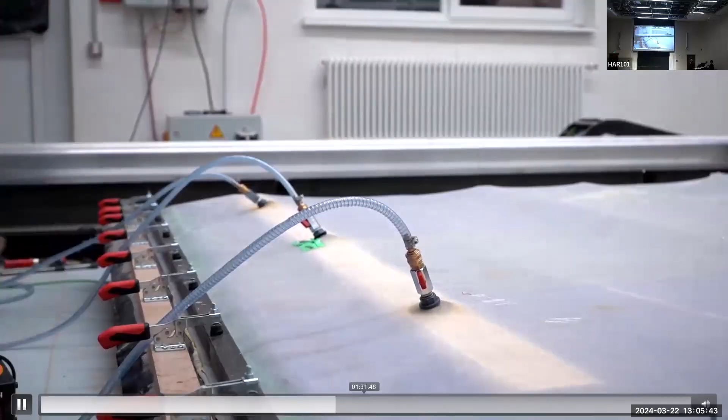That's also maybe the really clever thing, because you and I can bend a small piece of wood, right? But I don't think you can bend a 30-foot panel, right? I can't. And I would need a pretty big machine in order to do that. So that's almost where it becomes magic, because with one slight change in the parameter, I can have the wood curve differently, right?